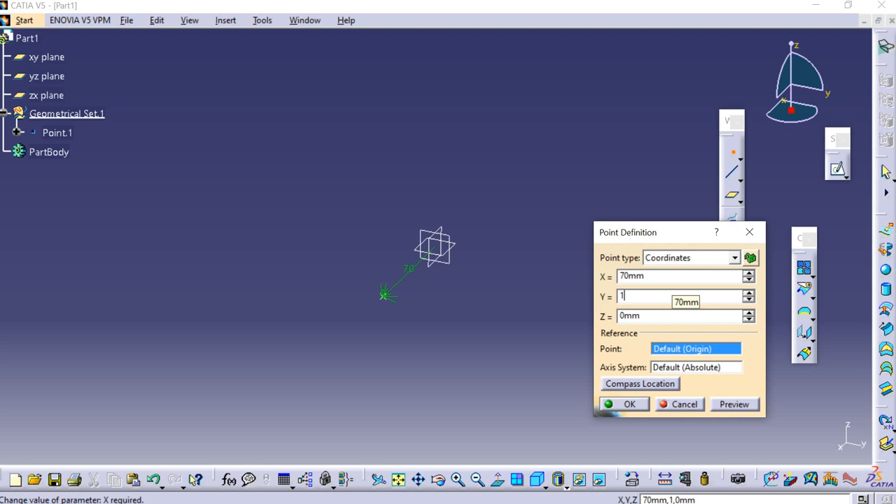Let us start off by creating points. We can create points using coordinates. We click on the point, and we have the point definition dialog box. Let us enter 70 mm, 100 mm, and 120 mm, and click on OK. We can see that a point is created at the mentioned coordinates.

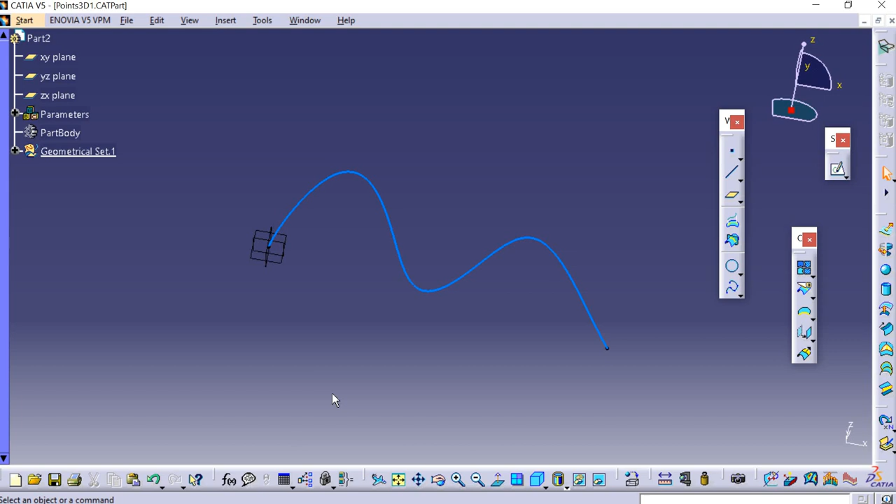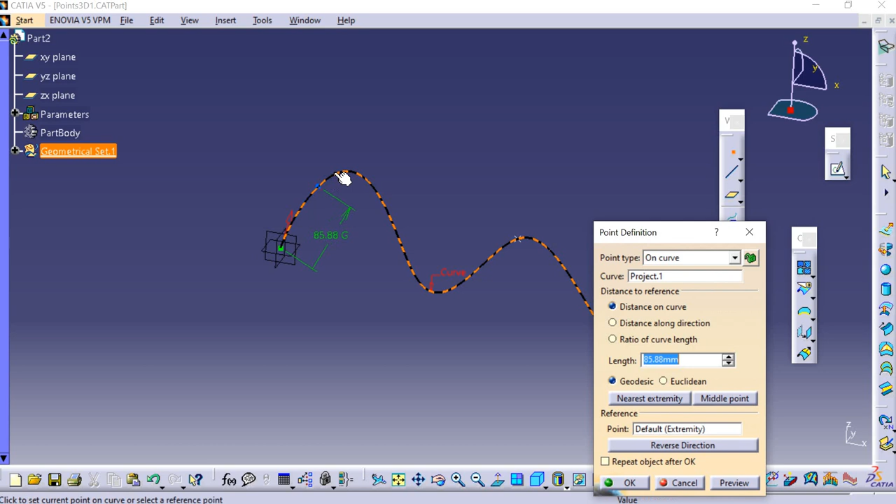Now to draw a point on the curve, let us have a curve like this. Click on point, select the curve where we want, and select where we want the point on the curve. It can be at any distance from the origin. Click here, click on OK. We have a point on the curve. You can again select the curve and select the point and click on OK. This is how we create a point on the curve.

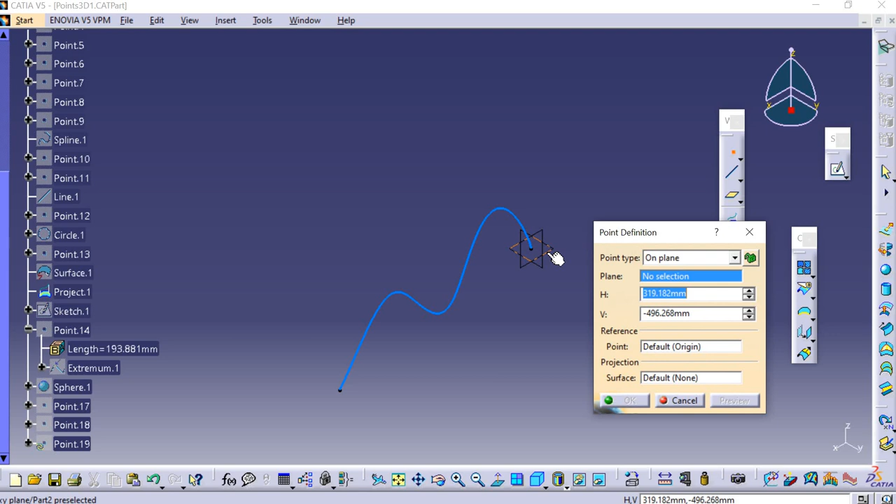Now to draw a point on the plane, click on point and select on plane, and select the plane on which we want to draw the point. Select this plane. You can see that on the XY plane a point can be created. We can also create a point on the plane of the YZ axis like that. This is how we create a point on plane.

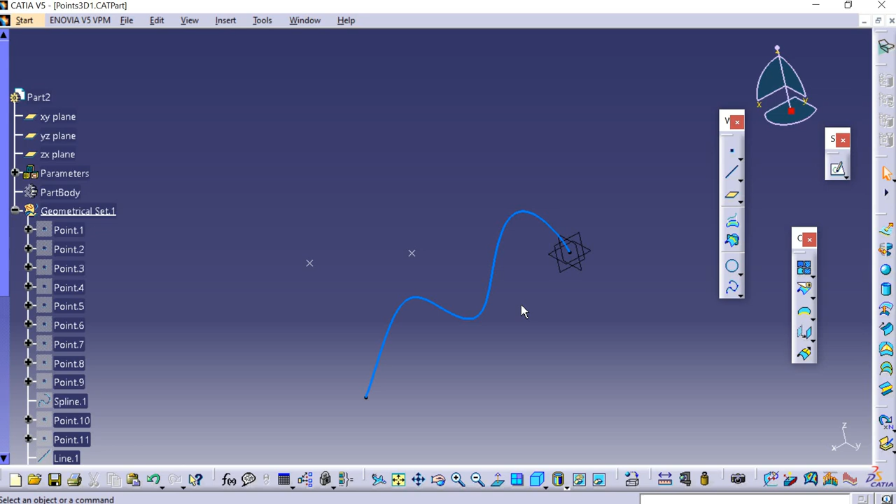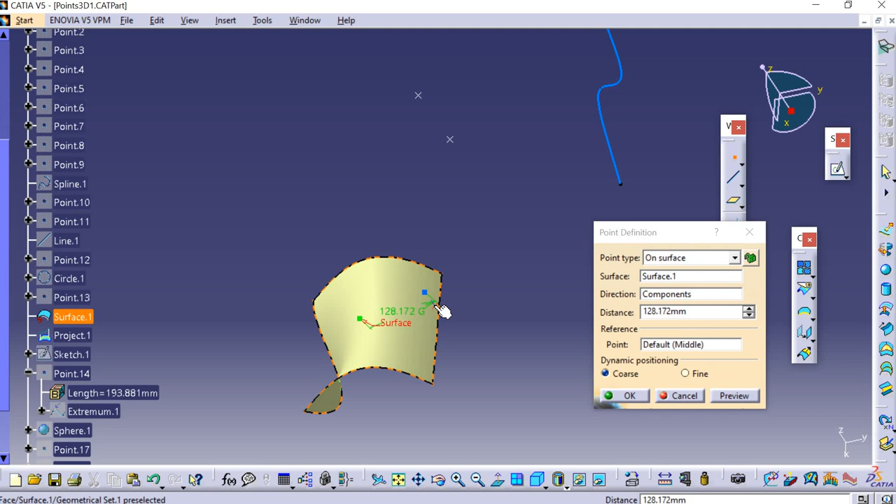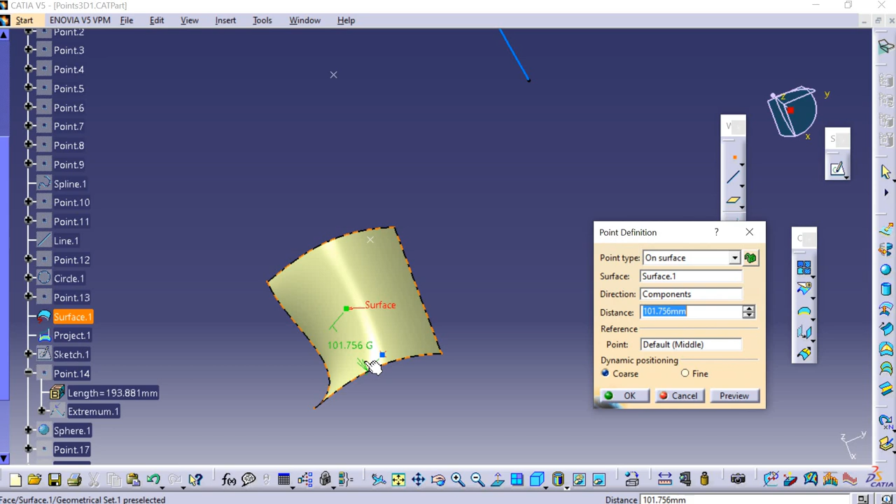If we want to create a point on the surface, let us say we have a surface like this. Now click on point, select on surface, and select the surface. You can see that we can create a point anywhere on the surface, but once we get out of the surface, the point will not move. So you can create a point here, click on OK. You can see that a point is created on the surface. We can also create a point on surface, select the surface, in this corner, click on OK. We can see that a point is created on the surface.

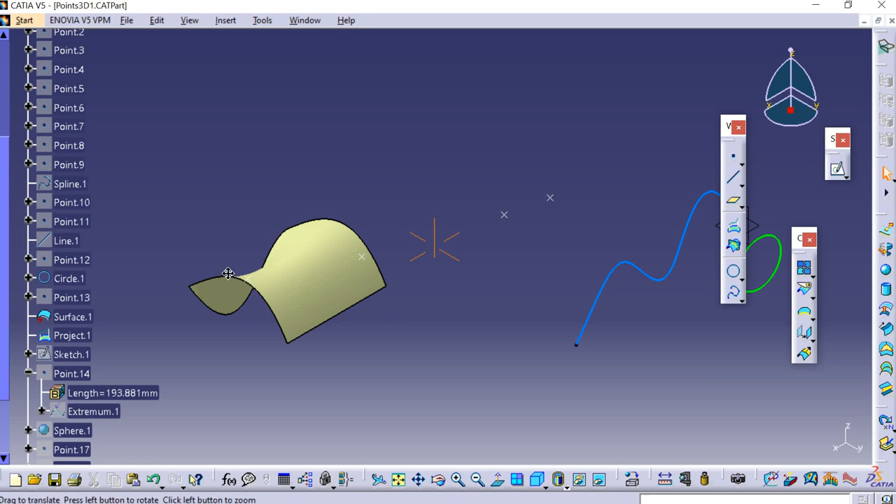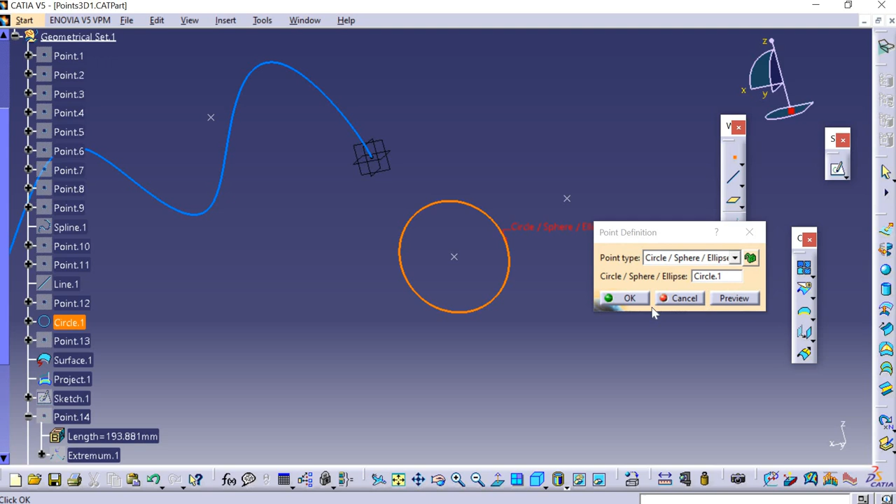Now to create a circle center, let us have a circle like this, and click on point, click on circle sphere, and select the circle. We can see that this is the center of the circle, this point over here. This is a point displayed at the center of the selected circle. Click on OK.

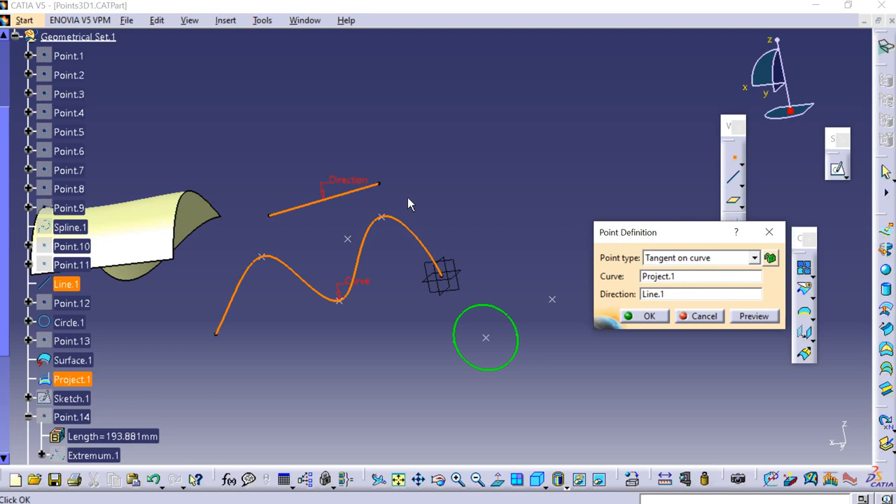Now to create a tangent on curve, let us select point, and select tangent on curve, select the curve, and direction is a line on top of the curve. Save this. You can see that a point is created exactly at the tangent of the line on the curve. Click on OK.

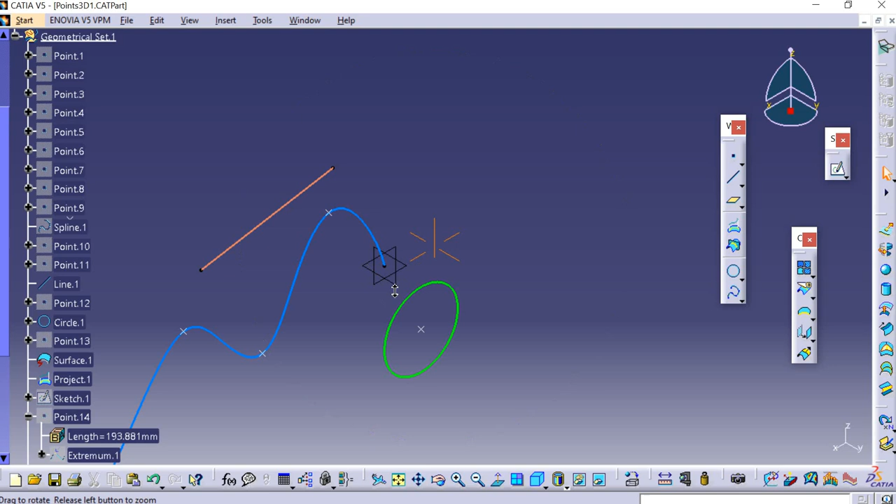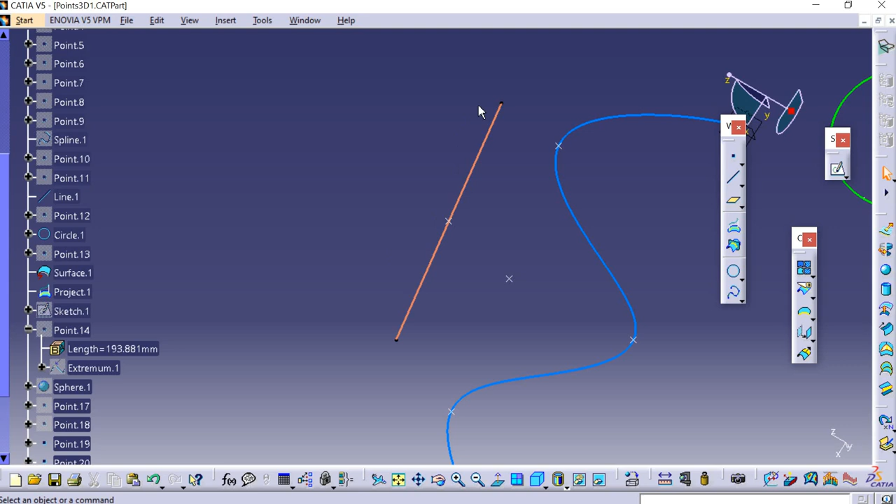Now to create a point between a line, let us select point 1 as this and point 2 as this. The ratio of 0.5, click on OK. We have a point right in between the two points. Point 1, point 2 line, and this is the point created. So this is how we use point in surface design.